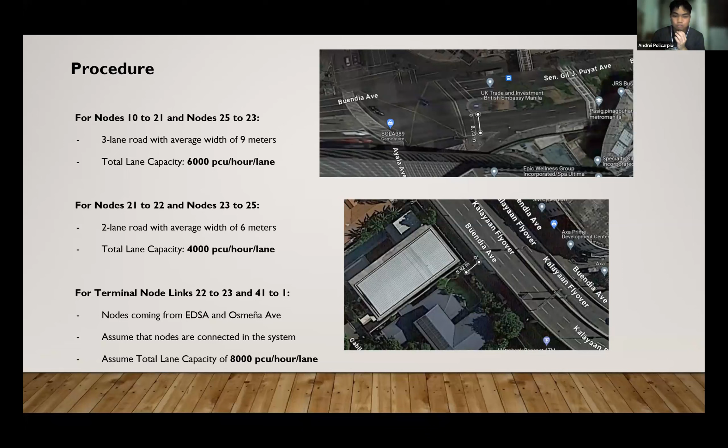For the terminal links, or the links from the end of EDSA and Osmeña, we gave it 8,000 PCU per hour per lane, since Osmeña and EDSA have 4-lane roads. We assumed 4-lane roads for Osmeña and EDSA Avenue. So next.

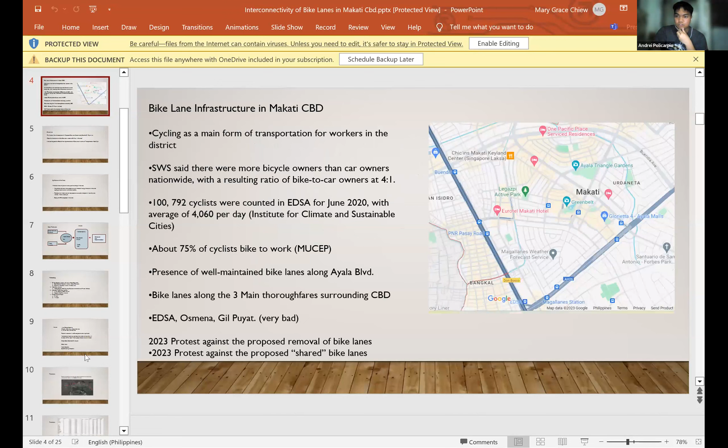Sir, the IFN we plan to use is for the roads. We do two scenarios as mentioned, without the bike lane and with the bike lane, but the flow would be for private vehicles, IFN used only for private vehicles. What I mean is you need to include the surrounding area of the bike lane so that the car can have alternative choices to move a different path if they are not using that lane. Without giving them alternatives, you're basically modeling the traffic in the loop only.

Okay. Yes, sir, we'll also include the lanes going inside the CBD. Okay. That's a lot of lanes. You can easily download using IFN transport, so you don't need to do it manually. Sir, I have a question. I got a little confused about downloading the nodes on the website, that's why I opted to do it manually. Can I schedule a consultation with you, sir, on how to do it using the site? Yeah. We will do that after the presentation. Thank you, sir.

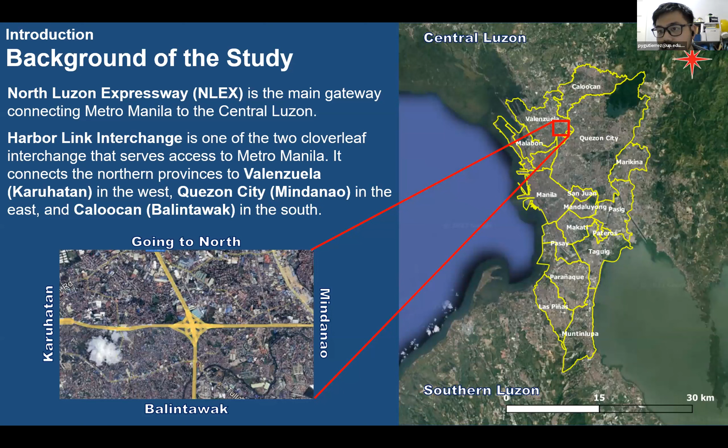Our objective is to reduce the conflict in the weaving section and eliminate the queue of vehicles on the weaving section, and of course on this whole interchange. So our hypothesis: by increasing the capacity of the weaving section and the cloverleaf ramps, it will reduce the conflict within the weaving section and allow the free flow of vehicles, thus eliminating the queue of vehicles.

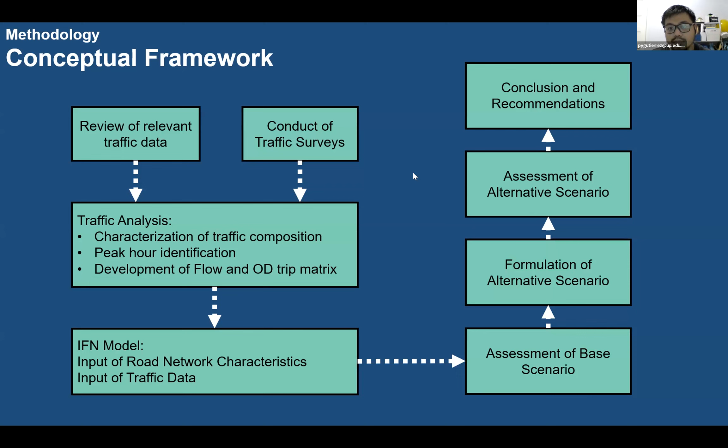So for the initialization, the inputs to the IFN model. During our modeling process, we consulted with Prof. Kardi. In OpenStreetMap, there are a few missing links on this interchange. So using QGIS, we added the missing links, the ramps that are missing in this interchange in OpenStreetMap.

The constraint we used is the capacity. For the main carriageway, the main line of this expressway, we used 2,200 PCU per hour per lane, since on the main carriageway the maximum limit is 100 kph. On the ramp we used 850 PCU per hour per lane, because it has a much lower speed limit of 40 kph. So here are the screenshots of our inputs in the IFN model.

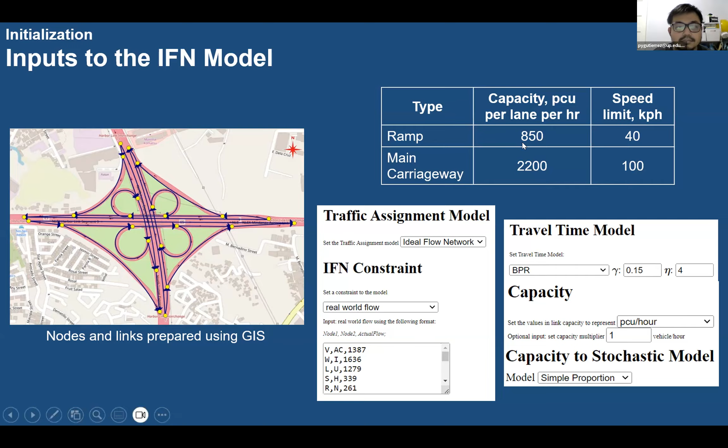So for the traffic data, here is the figure of the OD matrix. We identified that the peak hour for this interchange is from 10 a.m. to 11 a.m., and the majority of trips are of course NLEX north to NLEX south, shown as the yellow arrows. In terms of ramp volume, the high number of vehicles are using the southwest and southeast cloverleaf loop ramps, 1,379 and 1,069. That's where the weaving effect happens.

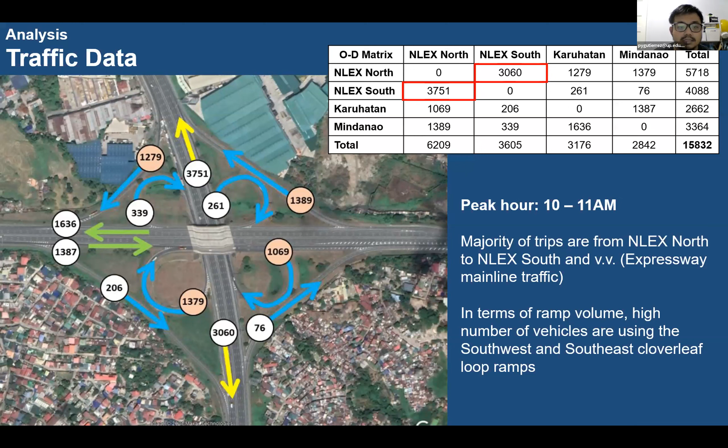So for our analysis of the base scenario, we ran the scenario with the inputs of the traffic flow with the OD, and the result is that the average congestion level is 112%. This is just the average, but we have a maximum that reaches 644%. For the network travel time, the maximum reaches 6,000, and the network delay also reaches 6,000. That's counted in seconds.

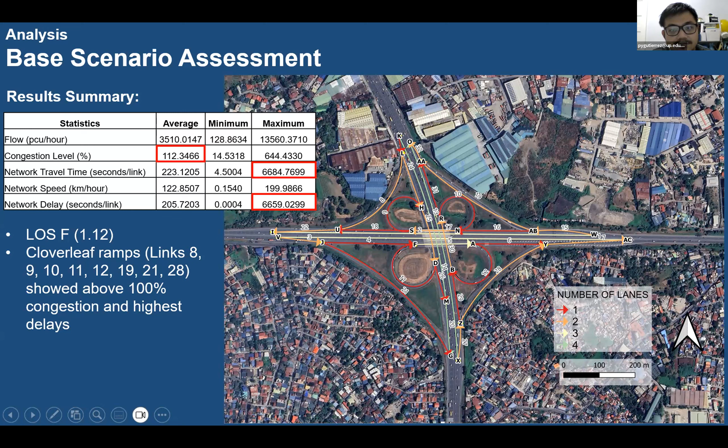In summary of the base scenario, in the figure you can see that the red arrows represent level of service F, and some represent level of service C and D. The cloverleaf ramp links 8, 9, 10, 11, 12, 19, 21, and 28 showed above 100% congestion and the highest delays. Based on the results, the weaving section is evident on links 5 and 17, at the merging and diverging points of the interchange.

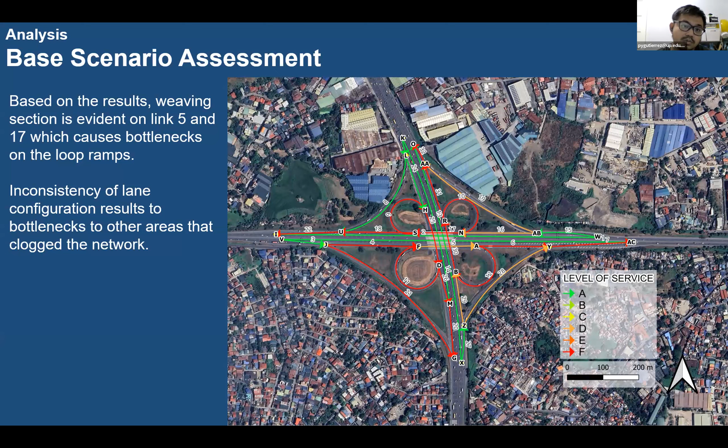Hey, good evening. So, naka-next na ba? Pao? Wait, the slide is not yet in the alternative scenarios.

For a while, Prof, will just repeat the screen share. Hi, sir. I was... Kat, can you share it? Ben will share. Okay.

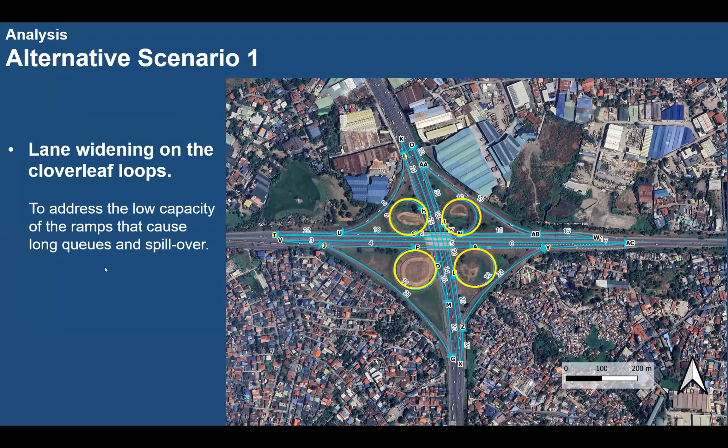There. So, the first alternative scenario is simply adding 1 lane to the cloverleaf loop. So, what we try to do is make changes little by little for economic concerns. So firstly, the first alternative scenario will address the low capacity of the ramps that cause long queues and spillover. So next slide, please. Next.

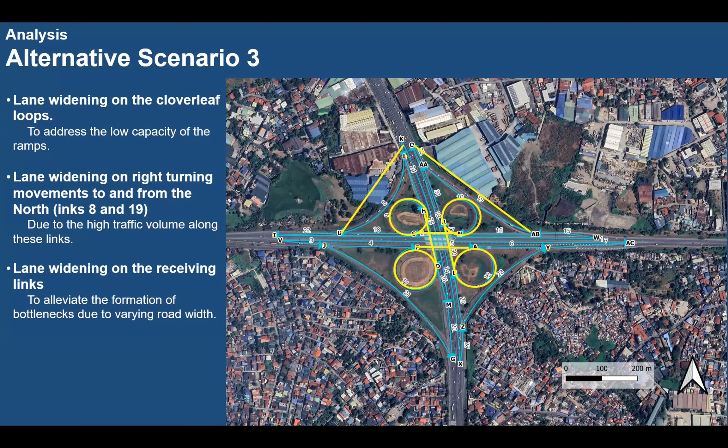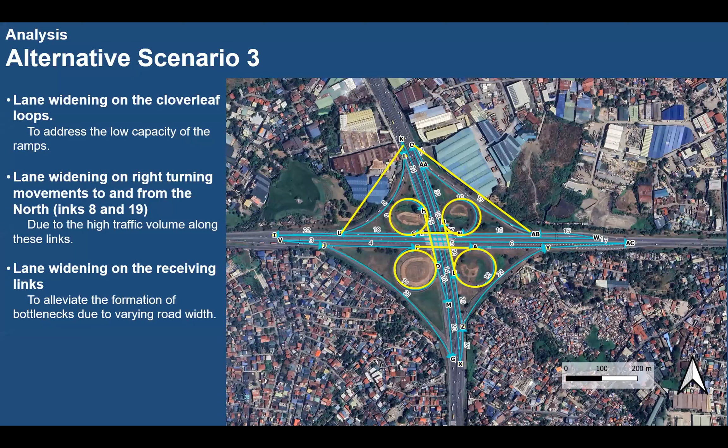So our third alternative scenario. So for now, these are the alternative scenarios we have considered initially, but of course, we are also considering more after this. So in addition to the first two, the lane widening on the cloverleaf loops and lane widening on the right turning movements to and from the north leg, now we added lane widening on the receiving links. So the links, as you can see in the middle of the intersection. These are the links that receive the turning movements from the cloverleaf loops. So this will ideally alleviate the formation of bottlenecks due to the varying or inconsistent road width. So next, please.

So for the last alternative scenario we have modeled so far, the congestion level was seen to further decrease from 98, now it's at 93%. So the changes we have made so far have caused a positive effect on the congestion level and network travel time and delay. However, the LOS is still on the extreme side. So for the conclusion, I will be turning over to my group mate Bien.

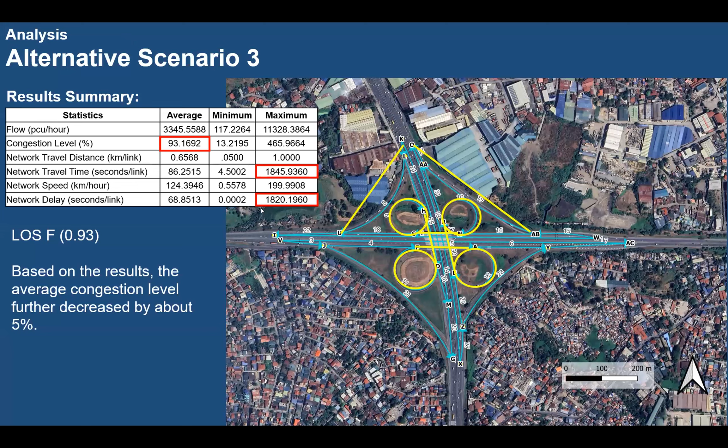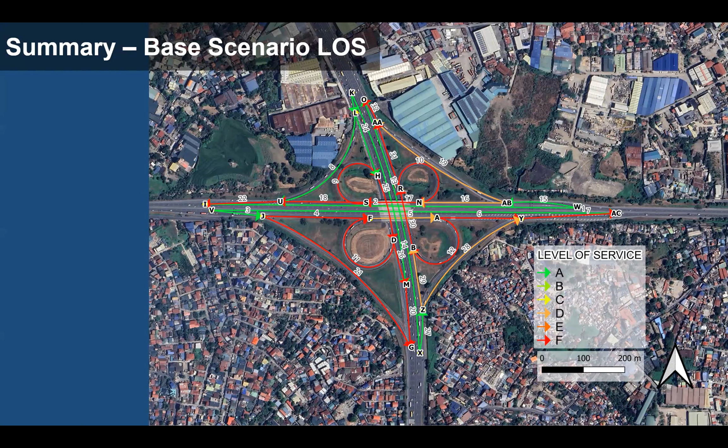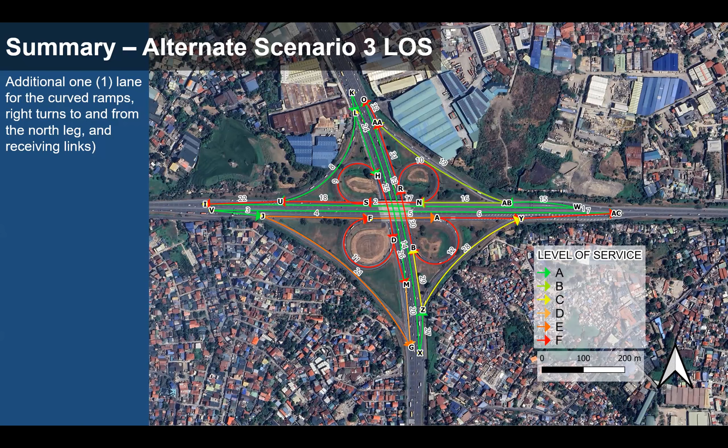Okay. Very, very nice. So is there any comment or question to this group? Anyone? I have only one question. I think your presentation is very nice. Is there any cloud node in what you presented, because your network is actually not strongly connected? Yes, Prof, we clicked on the cloud symbol in the IFN model to generate cloud nodes and links. Okay, good. Thank you.

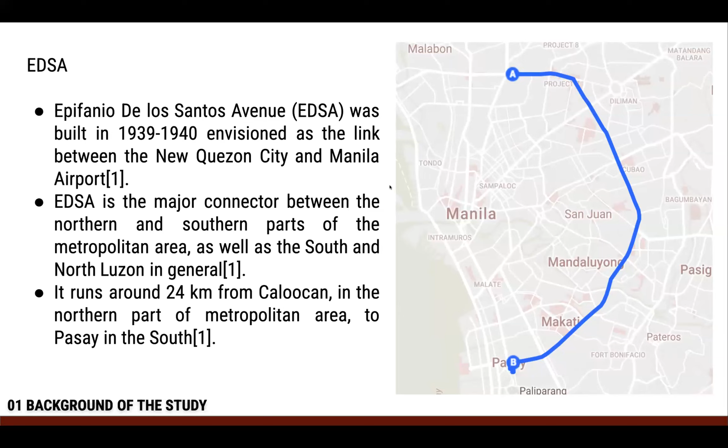For the next slide, for the current EDSA traffic situation, based on the latest report from MMDA, the annual average daily traffic in EDSA already reached 410,844 vehicles in 2022. And the average speed during the GCQ period is only 27.6 kilometers per hour for northbound and 31.57 kph for southbound. Due to this traffic situation, various initiatives have been implemented, such as the EDSA carousel of the Department of Transportation.

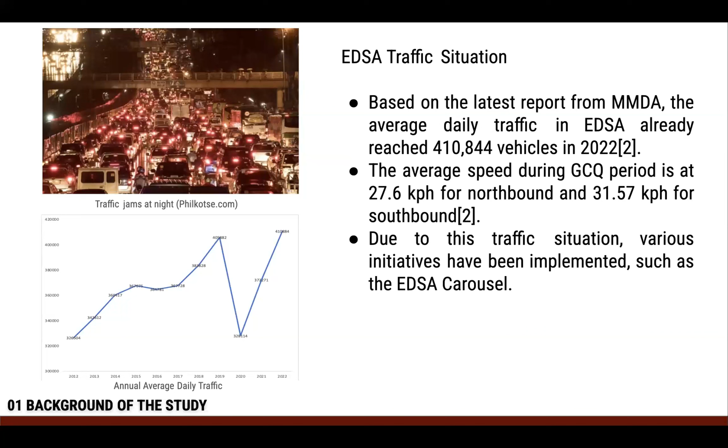Next slide, please. So our study aims to investigate the effectiveness of increasing the number of dedicated bus lanes and adding motorcycle lanes along EDSA in minimizing traffic congestion. Basically, our research question is, how will these scenarios impact and reduce traffic congestion along EDSA?

And our objectives of this research are, first, to assess the impact of increasing the dedicated bus lane on travel time, congestion, and traffic density along EDSA. And then assess the influence of adding a motorcycle lane. And after that, we are going to compare and rank the scenarios, including the existing base scenario, in order to identify the most feasible traffic simulation for implementation along EDSA.

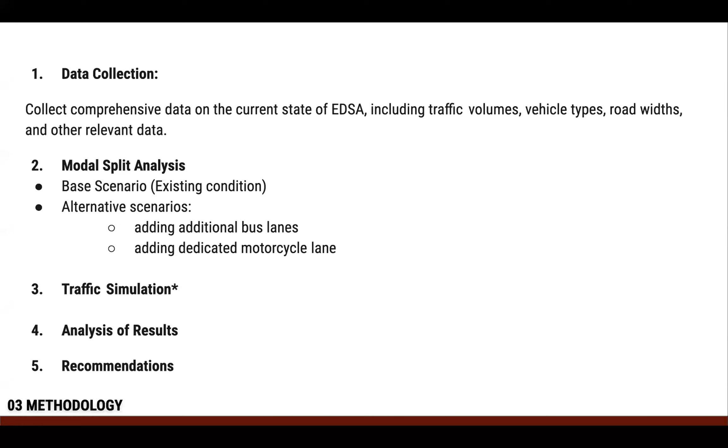And then we used a growth rate model instead of the linear regression model, because when using the linear regression model, we get decreasing values, which is counterintuitive given the increasing annual average daily traffic of EDSA.

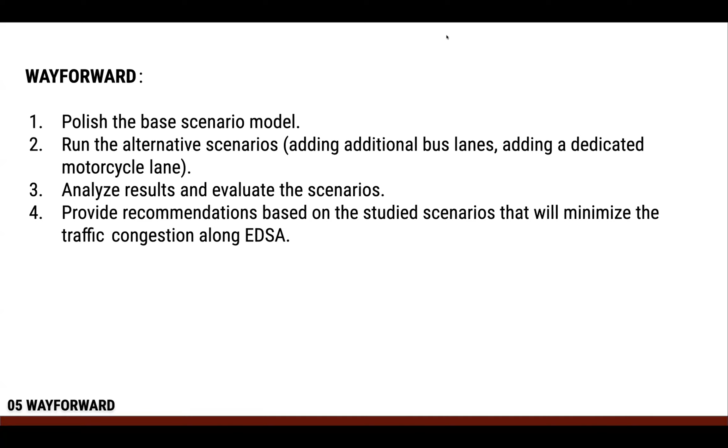That's all for our group. Thank you. Okay. Are there any questions or comments for this group? Yes, Marie.

I'm not sure about EDSA because I have not been in Manila for quite a while now. But as far as the data I saw online, I assume that there is a bicycle lane in EDSA. Since you told Andre and me that it's not advisable to have a bicycle lane in EDSA, maybe it will help their group in their analysis if they add that it's not recommended, and maybe they can use the existing bike lane in EDSA for their motorcycle lane. That's my answer.

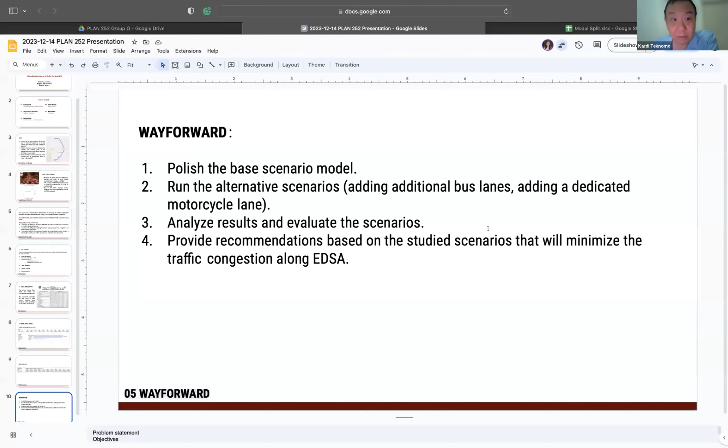Any comment for the group? Yeah, okay. So there are several things I would like to comment on. You mentioned the traffic is 410K, right? 400,000 AADT, annual average daily traffic. That means per hour in the peak hour, it's usually about 10%. You don't divide by 24, but take only about 10%. Because if you divide by 24, that is not the peak hour. So approximately 10 to 12%, rather than dividing by 24.

Number two, your capacity is also very low. If the lane is about 3 to 3.5 meters, it's usually around 1,800 to 2,000. But your capacity is only 1,250, right? So this is a bit low. And then you probably want to analyze whether there is any capacity bottleneck along EDSA. That is probably the cause of the congestion, rather than the bike lane or the bus lane itself. So instead of increasing the lanes for the bus, for example, you can actually improve the capacity of the bus itself. That's another alternative, right?

And then the bicycle lane, I don't know why you want to have a bicycle lane in EDSA. A bicycle is supposed to be for feeder service rather than for the main haul, right? So it's a little bit of a strange concept to have a bike lane on the main road in the highway rather than to serve as a feeder service. When you use a bike, you're supposed to use it from the house to the main station rather than from the house to the actual office. That's a concept I'm not sure needs to be introduced along EDSA.

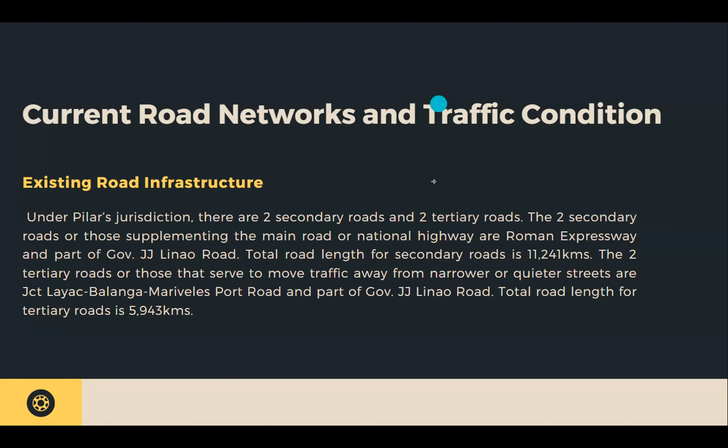Next, the current road networks and traffic condition. The existing road infrastructure: under Pilar's jurisdiction, there are 2 secondary roads and 2 tertiary roads. The 2 secondary roads, supplementing the National Highway, are the Roman Expressway and part of the J.J. Linao Road. Total road length for the secondary roads is 11,241 kilometers. The 2 tertiary roads, which move traffic away from the narrow or quieter streets, are the Junction Layac-Balanga-Mariveles Port Road and part of the Governor J.J. Linao Road. The total road length for the tertiary roads is about 5,943 kilometers.

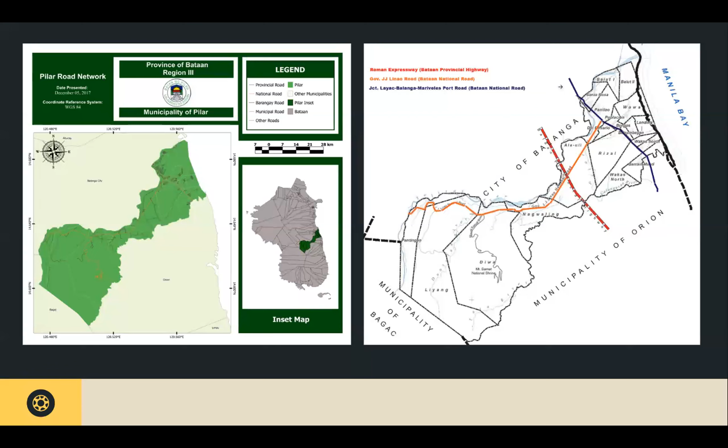Next slide, please. So this is the map of our Pilar road network. On the left side is the map from the municipality of Pilar, while on the right side is the more clarified map that we generated. On the right side, we can clearly see the municipality, the divisions of the barangays, and the major roads traversing the municipality. The blue line is the Junction Layac-Balanga-Mariveles Port Road, and the orange line is the Governor J.J. Linao Road, also known as Bataan National Road. The red one is the Roman Expressway, or our Bataan Provincial Highway. Next slide, please.

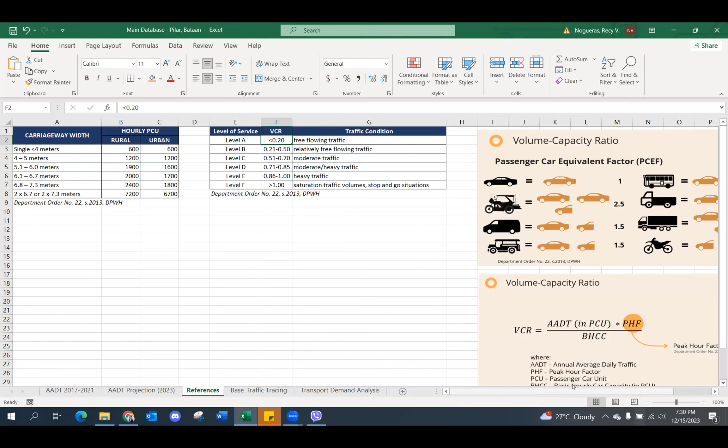And then, to present our base references, we used the BHCC, or the basic hourly capacity, or the link capacity, for rural and urban, with this reference from the department order of our department. And then also the level of service, with the description of its traffic condition. And also, just a reference for the PCEF, or the passenger car equivalent factor. We also have that one.

And also, I heard earlier, sir, that the peak hour factor is actually 10%. Okay. But in our agency we use 8. Okay, 8 is acceptable. 8 is also reasonable. Dividing by 24 is not. Yes, sir. Dividing by 24 is not really a good approach.

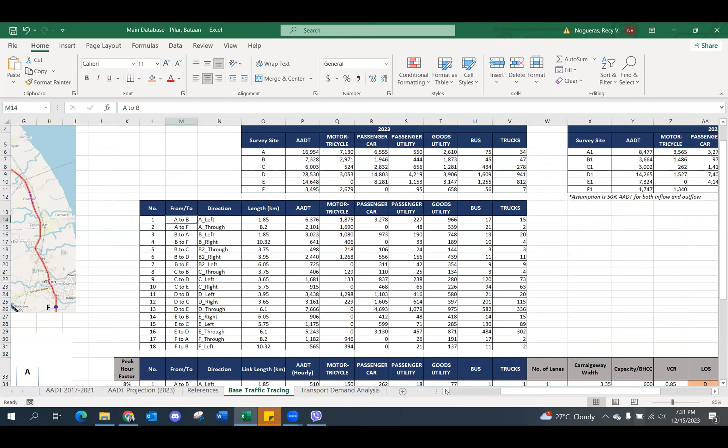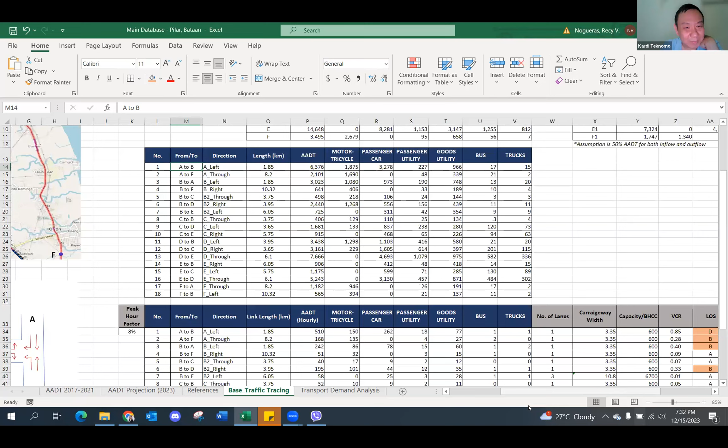So from there we identified 18 links from this scenario. I labeled them like A going left, A going through, something like that, just for me to familiarize myself with the directions. And then we reduced it to only 5 types of vehicles because it's too much. We consolidated the trucks and also the small buses and large buses, and considered them as just one.

And then we got it here. We got the ADT and multiplied it by 8% to get the hourly volume, so we could come up with our VCR and LOS. It's already formulated, sir, so whenever we change anything, the BHCC will change, the VCR will change, and the LOS will also change, based on our input here.

So that's the model that we use. And it's actually kind of frustrating that most of the links are LOS A, and only A to B, this one, A going to B, or A going left. I mean A going left. So that's it, it's only that one, given that only jeepneys and tricycles are passing that road network, or road section, I mean.

And then we actually did a classic transport demand analysis given the trips produced and trips attracted. And then we used the assumptions. This is where I'm not sure about the PCU conversion of the bus and jeep, but we can also use the PCU conversion here. Jeep is 1.5 and bus is actually 2, but based on the examples we used in the assignment, we used 3. Anyway, you can get that from the literature.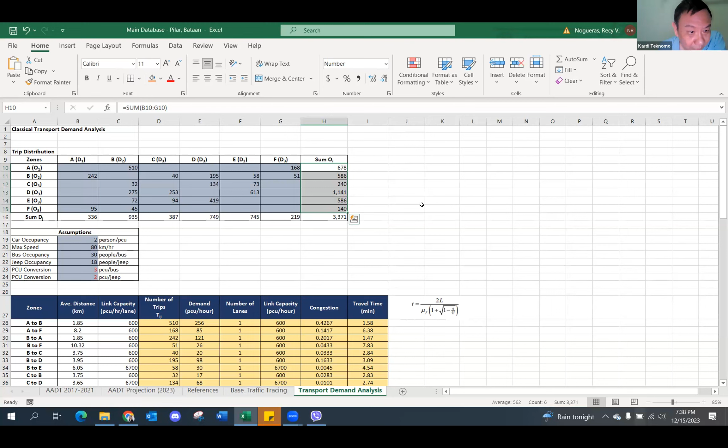If every link will be car-centric. How many percent is this? The congestion is 42%, sir. I want to ask, what is the meaning of this one? The congestion 42%, what scenario is this? I think this is the basic scenario, sir, where all the users of the road network are in cars. Oh, without public transport, it's only 42% congestion. No congestion at all. There's no problem, I think.

Yeah, sir, that's actually our problem. There is no problem with the area. That's why we tried to transpose it to the network representation, and we found out the network is underutilized. Right, so probably your demand or your OD matrix is too low. That's why we need your advice on whether we push through with the area. In reality, is it heavy or not? What do you mean heavy, sir? I've never been to this area, so you tell me the actual situation there.

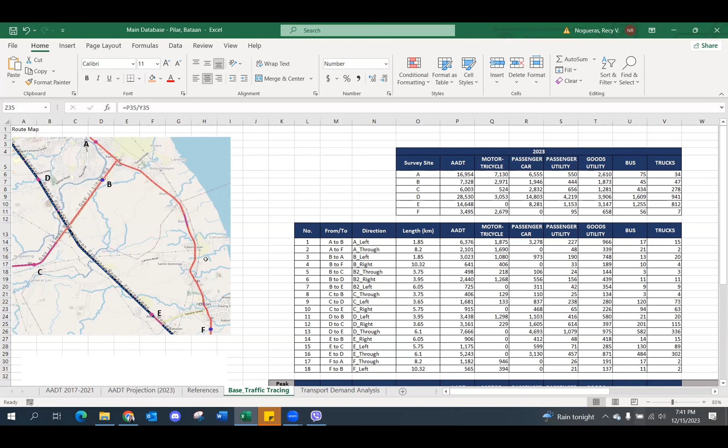Actually, sir, there's current congestion here in Alauli just because of the construction of a flyover in this intersection. This is a national road. I think Alauli is around here, am I correct, Marie? Yes. So that's the only congestion happening right now, because of the construction. But I think the construction is about to finish this month. That's the only one. Okay, so in that case, it is more interesting if you want to simulate the effect of that construction, for example. Is that something that you want?

From the construction from the past years to now, up to the current situation during the construction, and then after the construction finishes, what will happen? Something like that. Okay, sir. Well, like a projection of what will happen if the flyover is already constructed. Yes, because you don't have the data before the construction, right? Yeah, yeah. What do you mean, sir? We don't have the data before the construction.

No, if you have the data before the construction, then you can simulate three scenarios: before the construction, during the construction and after the construction. Okay, sir. So it's just the impact of the construction of a flyover on a national road. And you want to know what is the impact of that construction. Of course, temporary, but at the same time, what is the actual impact, right? That would be nice to see.

Yes, sir. Can we also include what traffic management plan they have before, during, and after? Yeah, of course. Since, right, what are the things that the implementer or the implementing office is doing, what are the improvements that they need to do to the traffic management whenever there is a construction of a road or flyover. Yeah, you can include that.

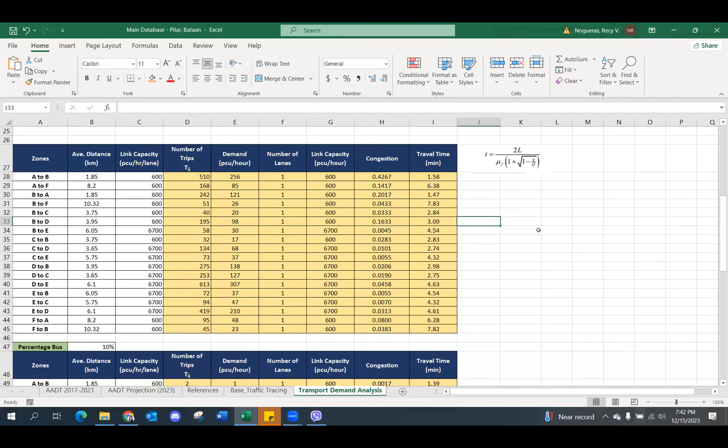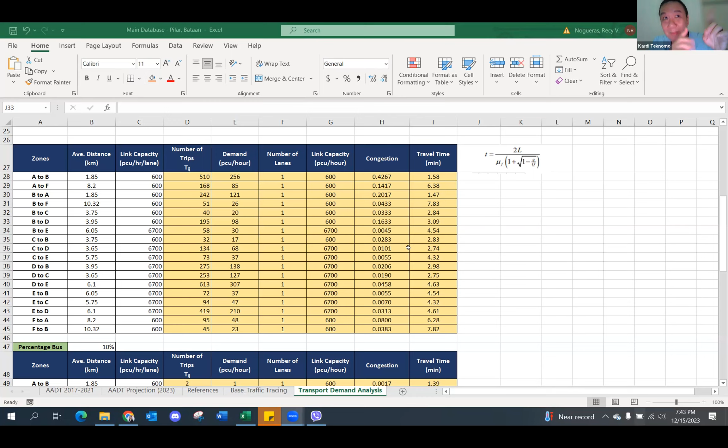Right. So thank you. I think the problem here is I don't know what is the problem. Sir, if ever we have to change the study area, I think we can do it fast. Because you have done a lot already in here. So probably you can stick here, but improve it. I guess the actual problem is here: your OD matrix is too small. Yes, sir.

So in that case, instead of using this OD matrix, if you use IFN, for example, you probably can use it based on maximum congestion, or you can include this OD matrix into the IFN. That will be helpful also. Yes, sir.

Okay. Abby, do you have any questions for sir about the IFN? Yes, sir, I think we have a query. Do we still have time? Sir, can we just have a scheduled meeting? You can email me. I already input data in the IFN, but I don't know if it's correct. In the base scenario for my IFN, using this data, it gives us I think 70% congestion. So I don't know if it's correct or not.

So we can just meet na lang, some other time this weekend. Yeah, for sure. No problem. Okay. Thank you. Let's schedule it. Right. So thank you. Thank you, sir.

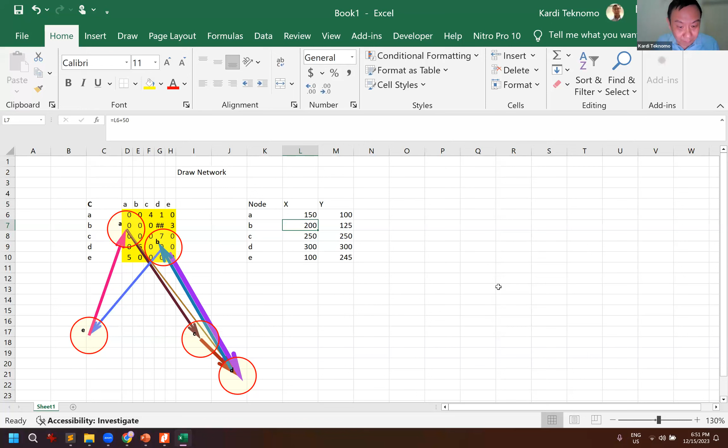But the Y is, for example, 200. There, A is here. C. So where do you want to put C? C is going to be 150, but here, say for example, you get 300 and so on. So you can set up your own coordinates to draw this network. Now if you don't like the drawing, you can also do a copy here, back here.

From here you can create what is called the stochastic matrix. Basically, it's the same as you take the sum here. I put the sum of this one. And then the stochastic matrix is basically just each of the lanes divided by the sum on each row. So here is this value divided by that sum. So I will put the value like this, then copy, and I got this value.

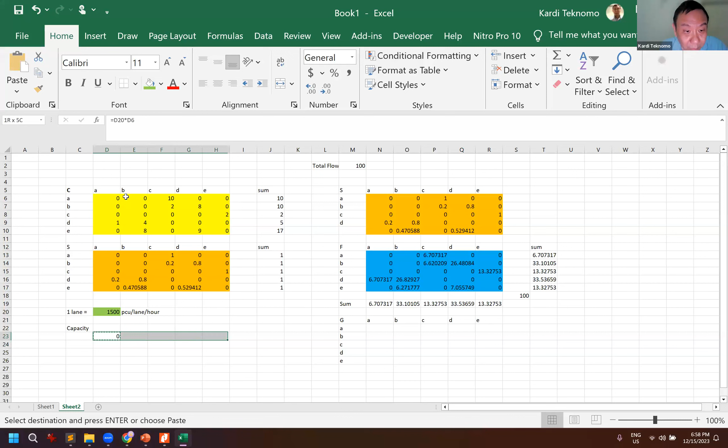Then now you need to calculate the new capacity matrix in PCU per hour. So I will just copy this. It is 1,500 multiplied by the capacity matrix. So then you copy to all. Oh, wait. This one is supposed to be with double. Then you copy all to 3, 4, 5. Is that correct? So if you have 10 lanes, that's supposed to be 15,000.

Now you divide your flow with the capacity. That's it. And then, of course, if error, that should be 0. There. Now, this is the congestion level. So in that case, you can put the color code. Of course, this congestion level is very low because your total flow is very small.

What happened is now you can calibrate easily. Say I want the congestion level to be 0.9. What I will do is, see, this is what I will put as yellow. I need to change the total flow so that the maximum congestion level... so I will put here max congestion. Max congestion is the maximum of this matrix. So this is very low.

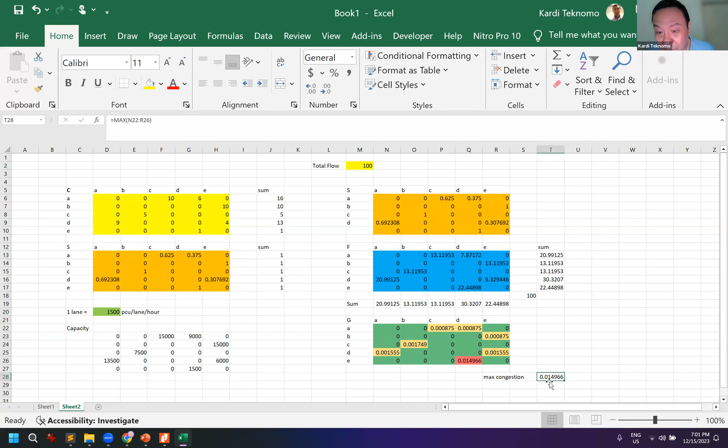I want to get the total flow in order to make this congestion level become 0.9. So you go to What-If Analysis, Goal Seek. I want this congestion level to be 0.9 by changing the total flow. It will run. Oh, did not get the actual result. We can continue. So set 0.9 by changing this total flow.

Oh, it's closer. So actually you can do it manually also if you want. For example, 25,000, what will happen? Oh, it's too much, right? So 20,000. Still too much, 19,000. So put 19,500. 19,700. Oh, okay, it's close.

Then when it's already close, you can use goal seek. This goal seek should be 0.9 exact, by changing this one. There, exact now. This is how you calibrate the IFN, by calibrating the total flow. This is what is inside that IFN transport program.

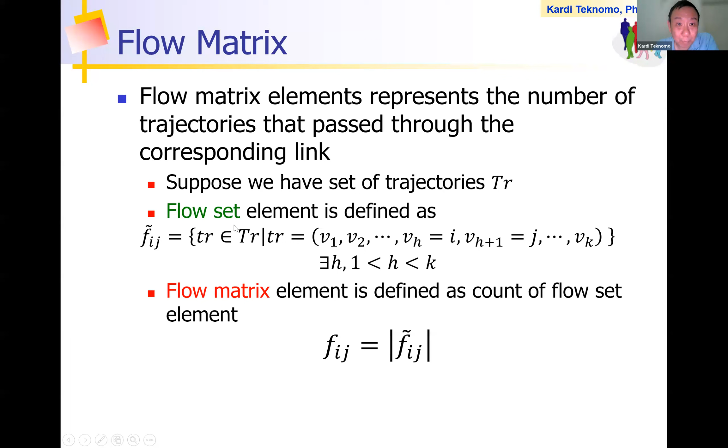A while ago, I just demonstrated that if you take the flow divided by the sum of the flow, you will get what is called a stochastic matrix. Now, the basic idea is simple. Assuming that you know the outflow probability distribution in each intersection, then you can generate a random walk on the network. Say I have this kind of network example.

In each node, with a certain probability given by that stochastic matrix, you do a random walk. And then you record the link flow as the sum of trajectories, and the agent will keep moving until time is infinity.

So in this simplified version, I will just use a simple network with only 5 nodes. The edge length is 1, the agent speed is 1. That means each agent will jump from one node to the next node in one time step. And let's do it in the lab. Go to this lab, random walk on network.

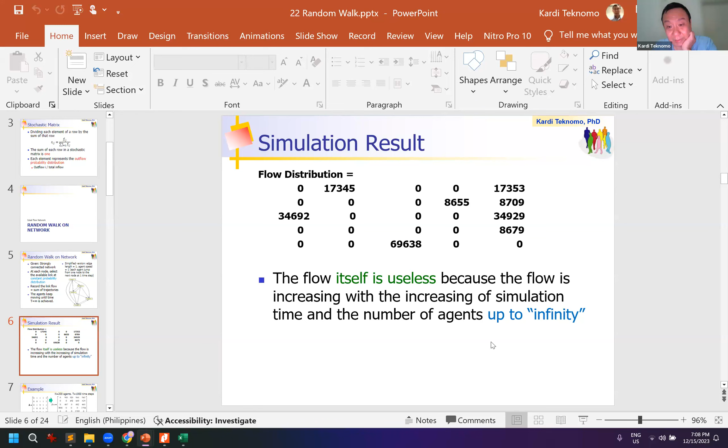So the simulation result, if you just do a random walk, is practically useless because the flow will increase over time, up to infinity. This is the example of the flow increasing over time. But when you divide that flow by the statistic of the flow, so it becomes relative flow, suddenly you will see it become integer numbers.

And not only integer numbers, you can see the sum of each row is exactly the same as the sum of each column. So this phenomenon is interesting. This is what we call an ideal flow network. I hope you understand the definition.

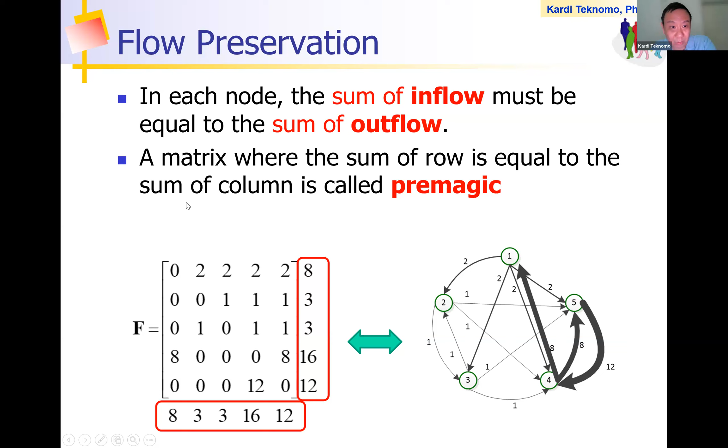And one nice thing about it is that it's based on network structure. So you don't really need to have the network utilization inside. It is an inherent property of the graph structure itself, right? And the node will preserve the flow. The total inflow will be exactly equal to the total outflow. That node preservation is what we call premagic. That means the sum of rows is equal to the sum of columns. Okay.

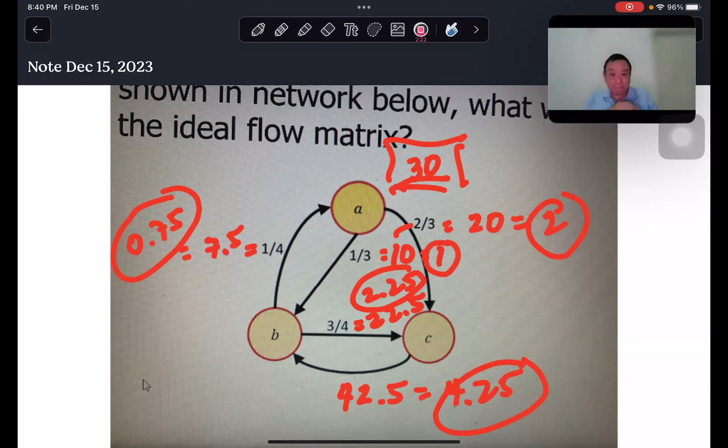20, 2/3 is 20, 1/3 is 10, while 1/4 is 7.5, 3/4 is 22.5. So the inflow for C is 20 and 22.5, so its outflow would be 42.5. Okay. And then check. Can you check in each node? Is that correct?

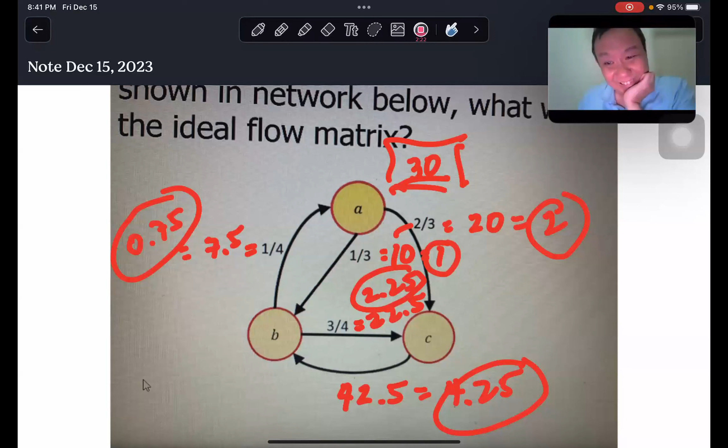What is AB? AB is 10. Yes, 10 here. And then going into node A is 7.5, but going out is 30. What is that? I think something is incorrect. Wait, sir. Yeah, still not correct. Okay, sir, I'll check again. Anyone want to try? Okay, Mari.

Okay. Here, and then I will share my screen. Can you see? Okay, you can annotate here. Yes, sir. Where is annotate? Options. There. So I multiplied 3 by 4, so this is 12. 2/3 is 8. And then C, since going in is the same as going out, this is 8. And then 3/4 is 9.

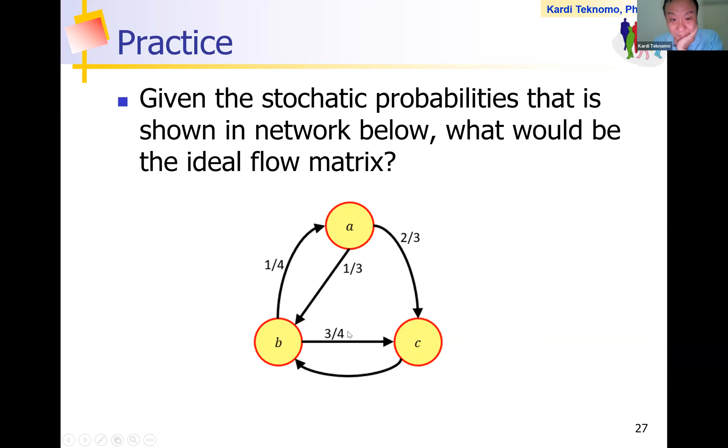Right. Okay, so at least you know how to compute manually the IFN, right? And from there, you can also make it minimum. This is the minimum integer, which is very nice. So you get 1, 2, 3, 9, and 11, similar to your value a while ago. This is what I call equivalent IFN. You can divide by the same scaling factor. I hope you understand that. Now, let's go to the next slide. Oh, where is the equivalent?

Equivalent IFN. Okay, so can you see the slide? Okay, so a while ago, you saw that when you have an ideal flow, you can multiply or divide by the same scaling for the whole network. They are actually equivalent.

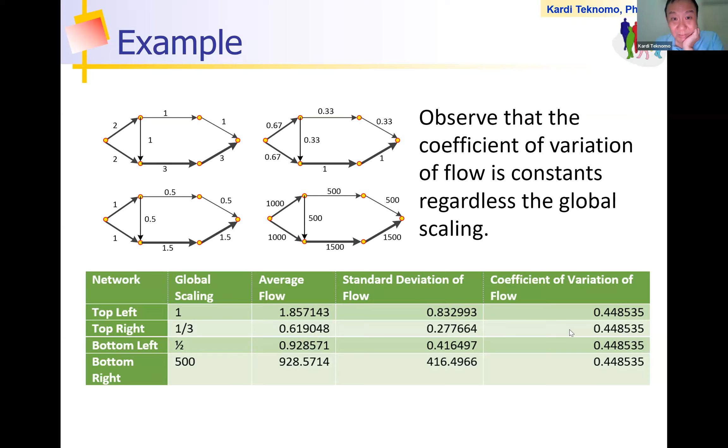You can compare two scenarios, okay, before and after, or current condition and alternative without any data. Yeah, you don't have all the data, you don't have flow data, it's fine. You can assume global scaling, say maximum congestion of, for example, 0.8, and then you can compute the current condition. What is the maximum congestion? And then for the alternative proposed scenario, what is the maximum congestion? Then you can compare whether this is actually better or not from the current condition.